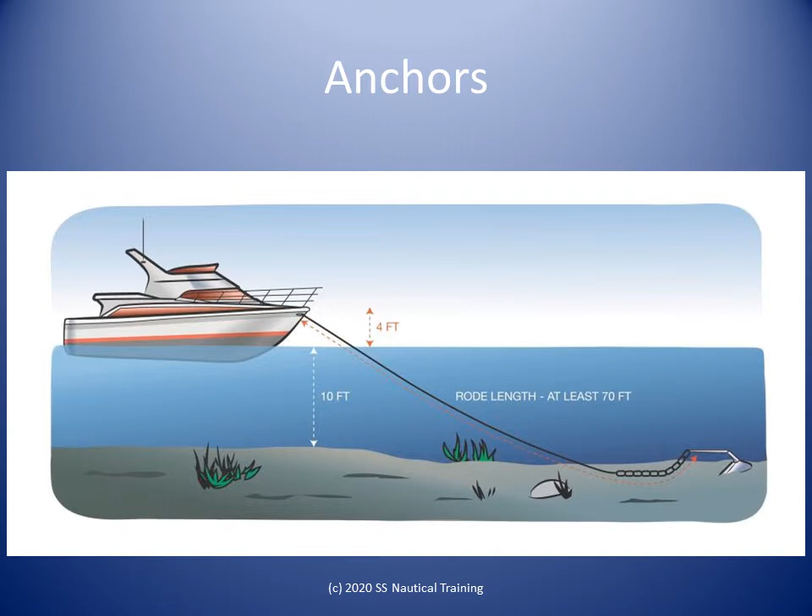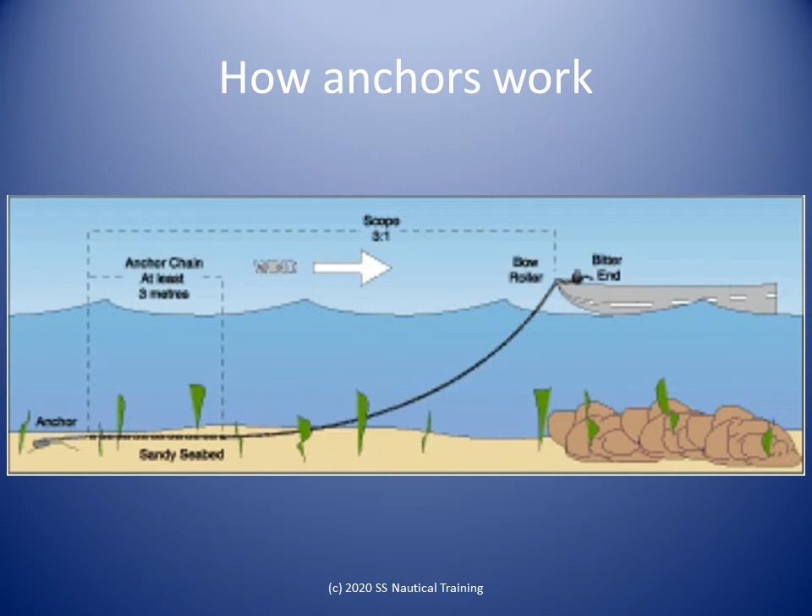An anchor is a device, normally made of metal, used to connect a boat to the bed of a body of water to prevent the boat from drifting due to wind or current. All anchors depend on their ability to bury themselves in the seabed to achieve their holding power. To do this, they need a certain amount of weight, sufficient to start the burying process, and a near horizontal

pull. Boats are required to carry anchoring and mooring equipment suitable for the size of vessel and waters in which it operates. Boats of less than 12 meters in length and certified to operate only in protected waters, that is, within 3 miles from a safe refuge, are permitted to carry just one anchor.

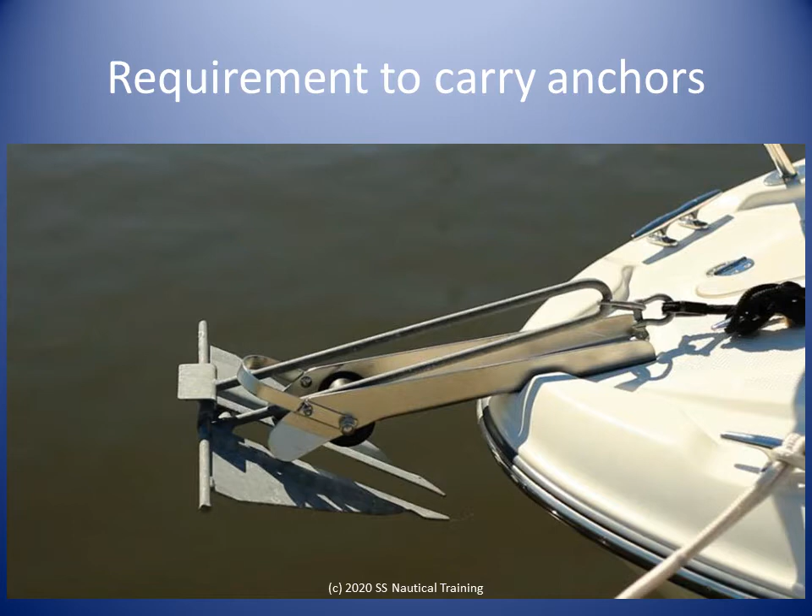Most of the time, the seafarer cannot see the anchor on the seabed. So the anchor had to be designed to function the same way all, or at least most, of the time. One end of the anchor is made much heavier than the other to ensure that end of the falling anchor is the first to make contact with the seabed. This part is called the crown.

The seabed in some areas can be rocky, so the crown has to be able to withstand falling onto a rocky surface. The crown is shaped and sized to make the anchor fall over once it has landed on the seabed. The crown supports the flukes. The flukes are the part of the anchor that is designed and positioned to dig into the seabed. To assist the flukes digging into the seabed, they are positioned on the widest part of the crown. This widest part is called the tripping palm. The shape of the tripping palm ensures the flukes point initially slightly down into the seabed.

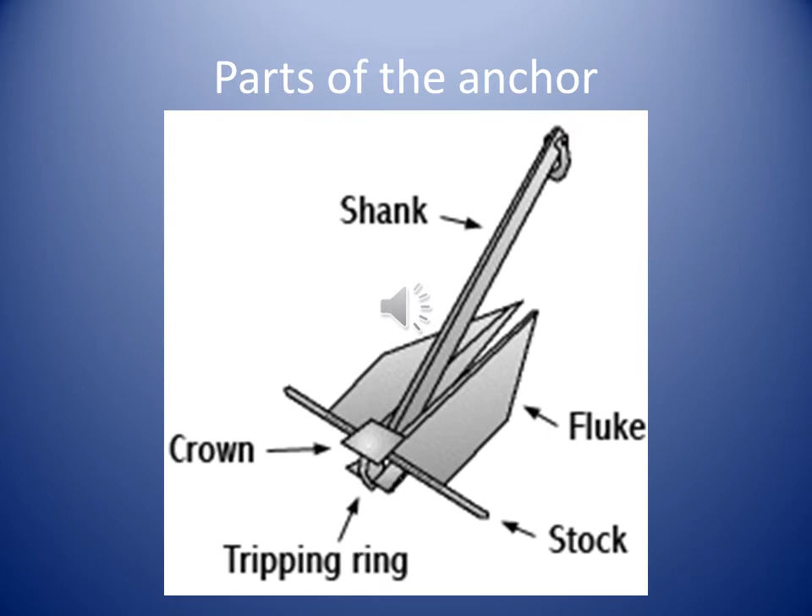The crown is also manufactured with a pivot at the center. A relatively long and very strong piece of steel has one end attached to the pivot in the crown. This long piece of steel is called the shank. This pivot allows the shank to be several degrees out of alignment with the flukes. The shank can lie flat on the seabed while the flukes are dug into the seabed. The opposite end of the shank is attached to the anchor cable or chain.

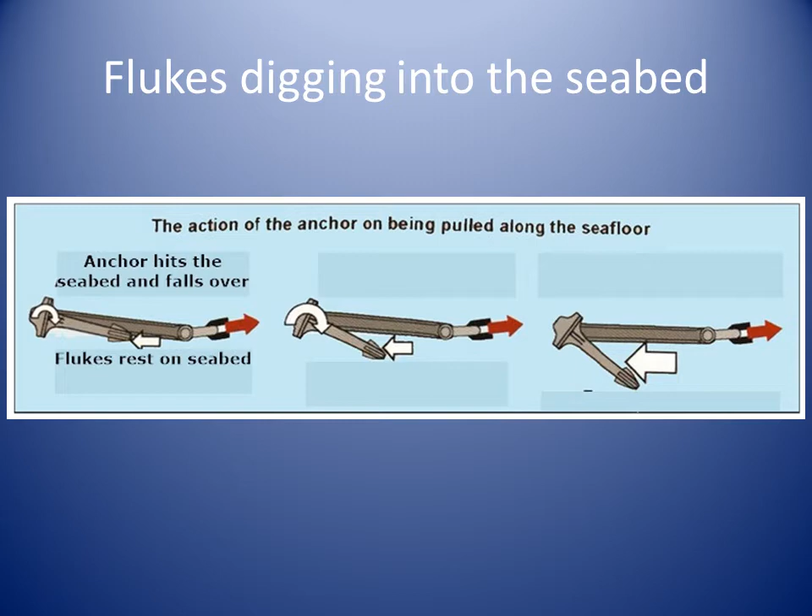On the left here, we see the anchor just after it hits the seabed. Having embedded itself, resistance to movement through the seabed is related to the amount of material that would be removed by the anchor if it pulled out. It follows that in principle an anchor with the largest effective fluke area has the highest holding power, subject of course to it being of sufficient strength.

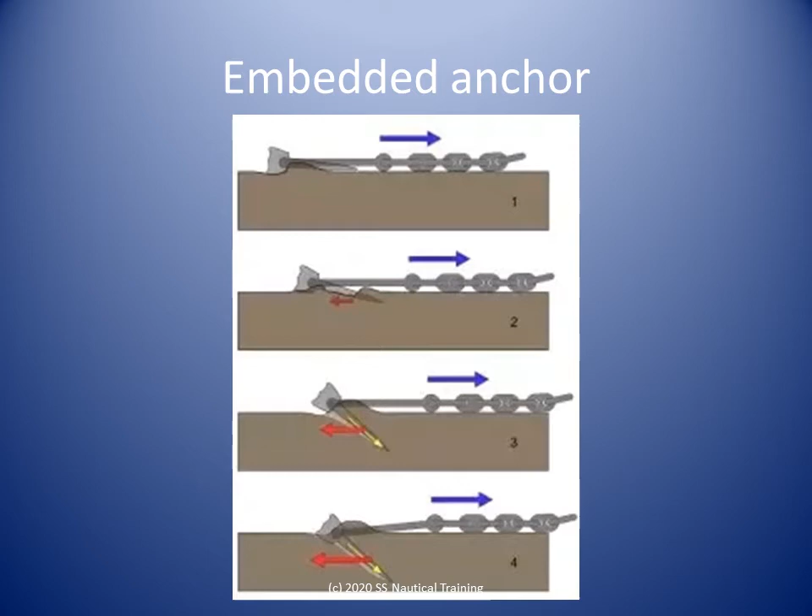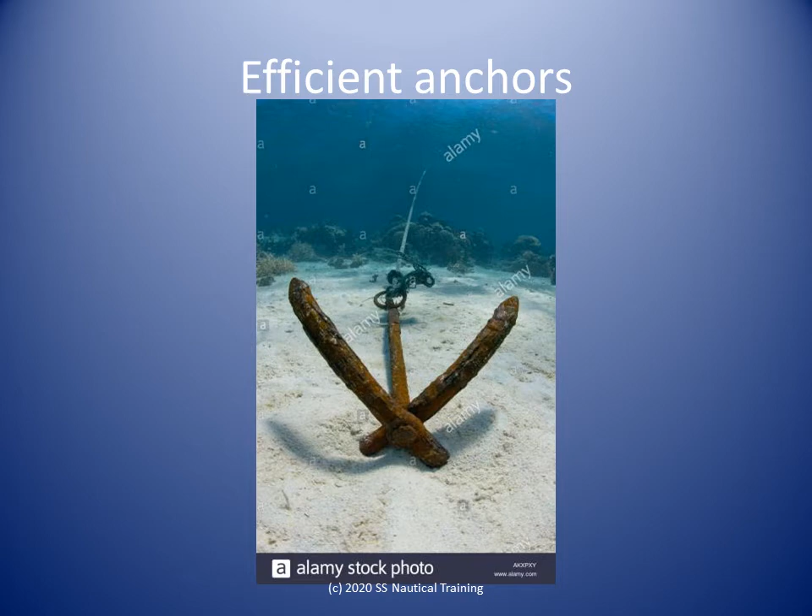The essential features of an efficient anchor include having enough weight for the initial penetration of the seabed. The anchor must bury itself deeply when subjected to a horizontal pull. Once buried, the anchor must have the greatest possible resistance to movement in the direction of pull. A good anchor must remain rotationally stable even when pulled through the seabed. The anchor must be able to break out of the ground easily when pulled upwards.

The holding power of any anchor varies with its size and with the seabed. The seabed is far from uniform. Even within a relatively small area, an anchor's performance is affected not only by the nature of the bottom, whether it is mud, rocks, sand, silt or shells etc., but also man-made inclusions like scrap metal. Compared with sand, soft mud reduces holding power by about a third, whereas firm clay can increase it by as much as 2/3.

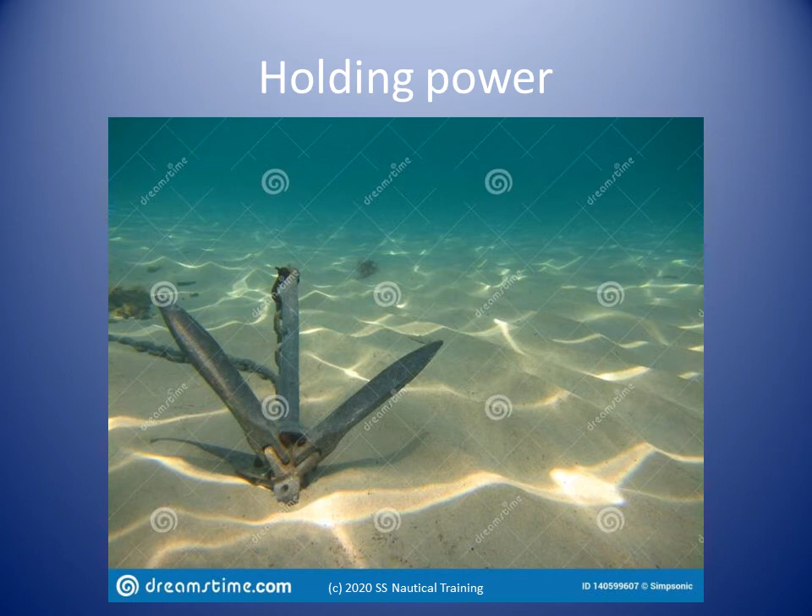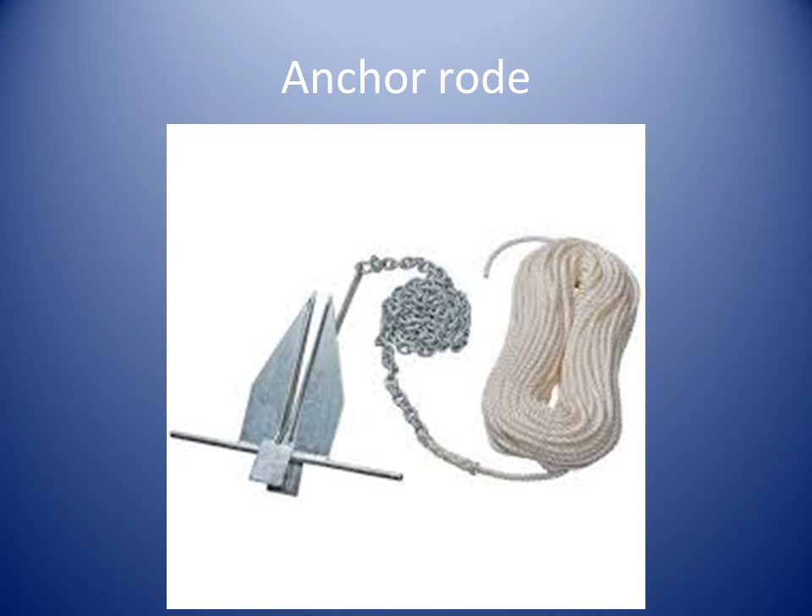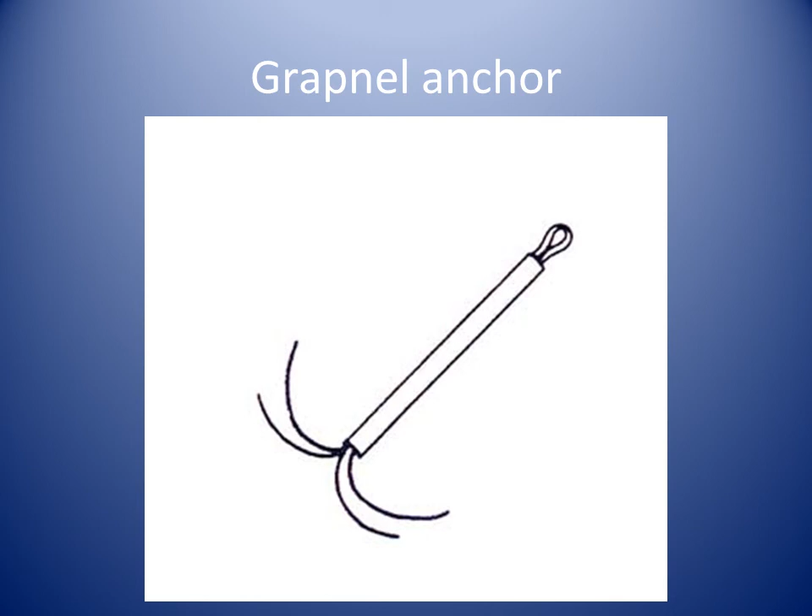The vessel is attached to the anchor by the rode, which is made of rope, chain, cable or any combination of the three. The ratio of the length of rode to the depth of water is called the scope. A grapnel anchor is light and generally used for small boats such as pirogues, kayaks, dinghies and canoes. It's also popular with fishermen. A grapnel anchor's holding power comes from hooking onto another object, such as a rock.

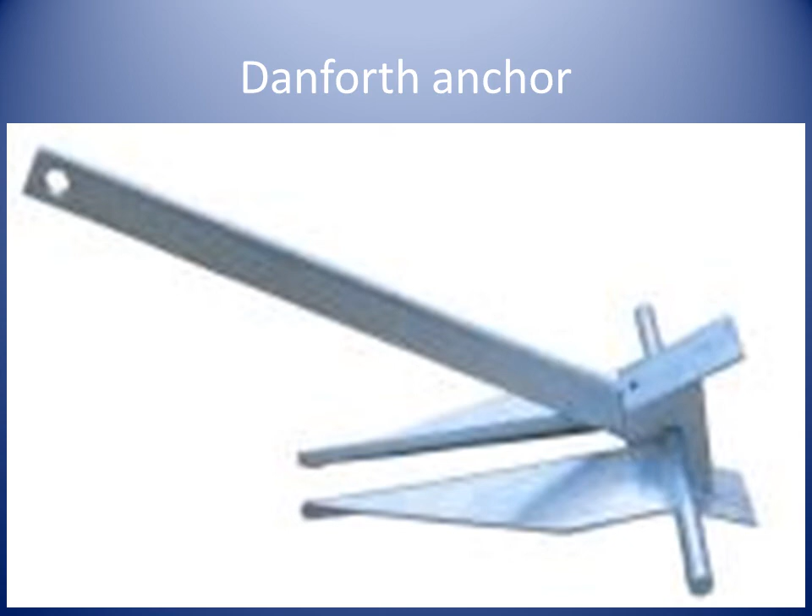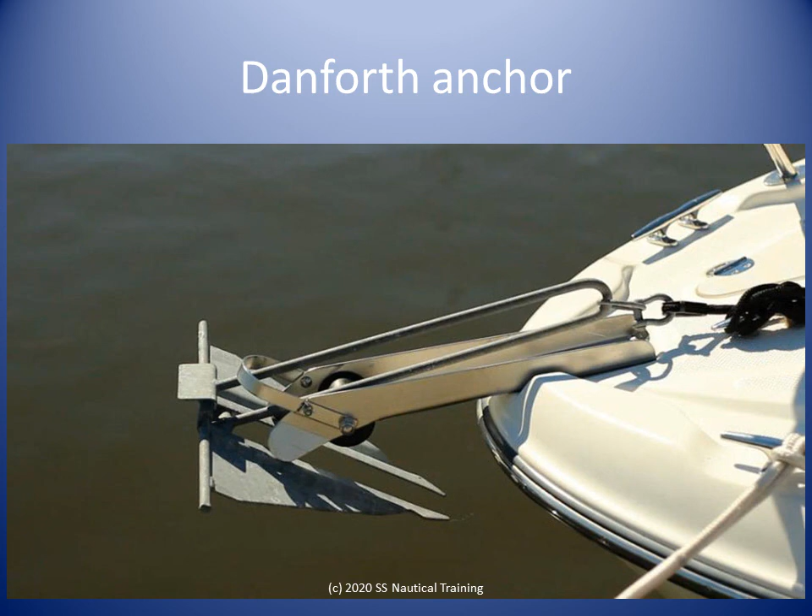The Danforth has wide, flat and sharp flukes. This type of anchor readily digs itself into mud and sand when it is heavy enough. It has a stock located at the head or crown which gives initial stability and alignment to help it dig in. The Danforth anchor's crown design is such that it offers little resistance both during the burying operation and also when it is being broken out again. It has the advantage of folding flat for deck stowage.

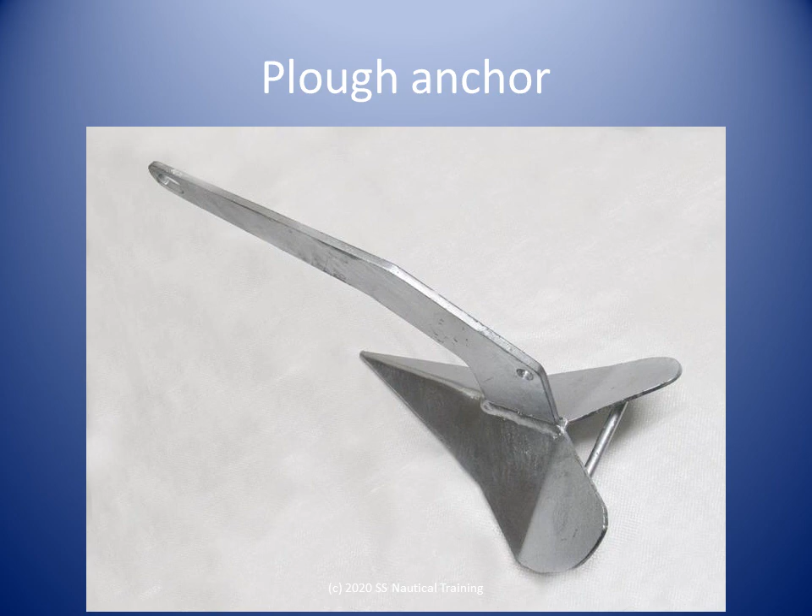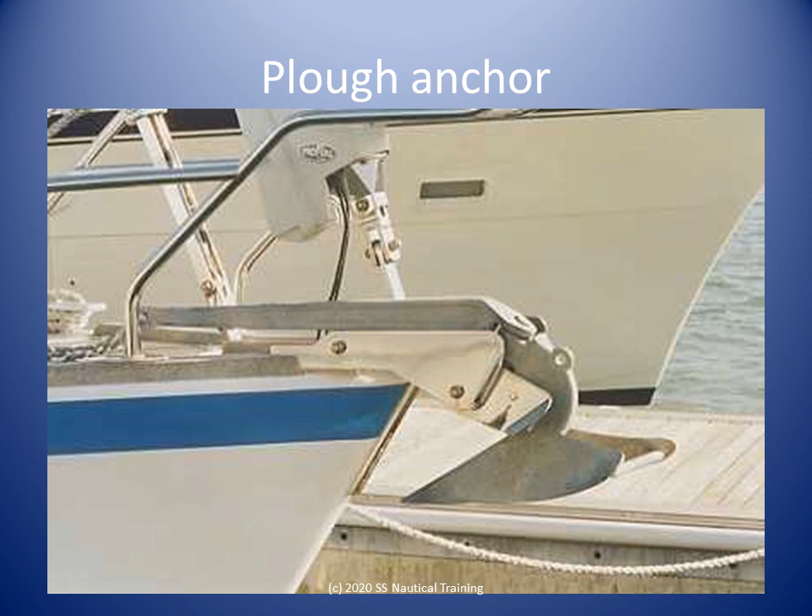The stockless Plough anchor is remarkably effective and, in its heavier sizes, penetrates kelp and seaweed, shell and overlying gravel better than most lightweight anchors. The Plough anchor is extremely efficient in mud and sand, and once buried will remain so even though the direction of pull changes with wind or tide, thanks to the angled hinge on the shank. When an anchor is more than 30 kilograms, an efficient mechanical means shall be provided for handling the anchor.